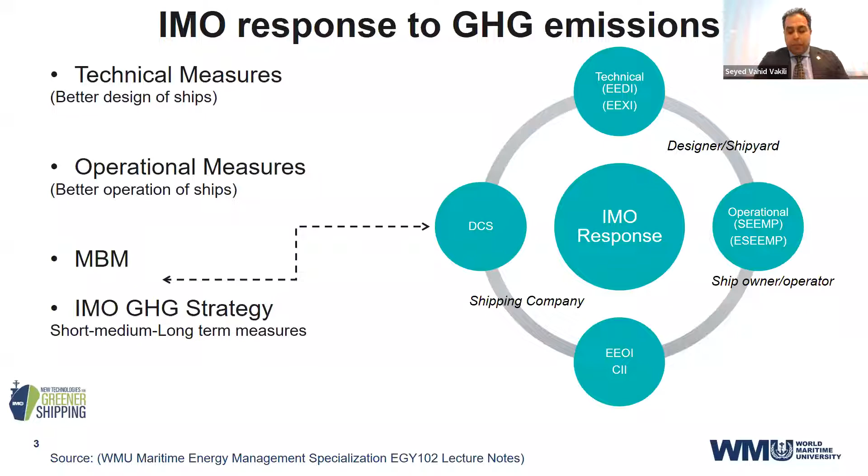The strategy divides the actions needed to achieve the targets into 3 different classes: short-term, mid-term, and long-term measures. As shown in the figure, IMO has applied multidisciplinary measures of technical, operational, and economic nature to reduce greenhouse gas emissions from the industry. EEDI and EEXI are technical measures to reduce emissions, while SEEMP and enhanced SEEMPs are operational measures. The third dimension is market-based measures, an economic perspective that takes into account the carbon market, such as emission trading system and levy, which may be discussed in the near future within medium-term measures.

Now, as I mentioned, this is the first round of polling. I will be grateful that my colleague already shared it, and I will be grateful if attendees attend to this polling. The question is: how much does the shipbuilding phase contribute to life cycle CO2 emissions? I would like to highlight that we are focusing on greenhouse gas emissions, CO2 as a greenhouse gas emission. I will be grateful if participants attend to answer this first question.

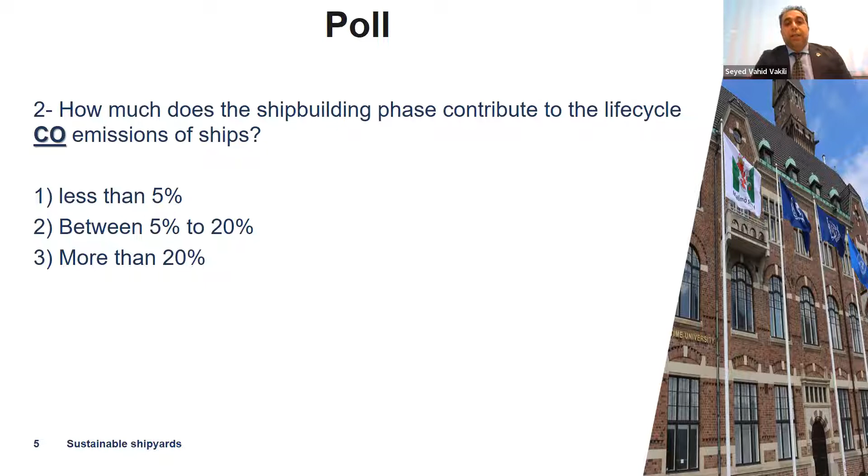And then the second question. Our colleagues are sharing all 6 questions which we want you to attend and answer. Second question is: how much does the shipbuilding phase contribute to the life cycle CO emission of ships? Here the focus is on air pollutant emissions, which is CO nominated here. Is it less than 5%, between 5% to 20%, or more than 20%?

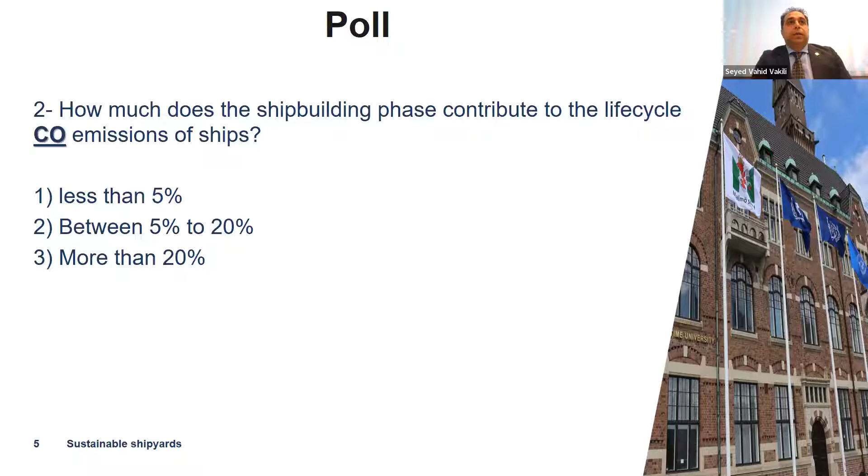The third question is: what is your forecast for the contribution of the shipbuilding industry to air emissions in the future? Will it increase, remain constant, or decrease? So what is your prediction about the contribution of the shipbuilding industry to air emissions in the future? Do you think it will increase, remain constant, or decrease? I will be grateful if all attendees answer this question, which will help us in our future analyzing.

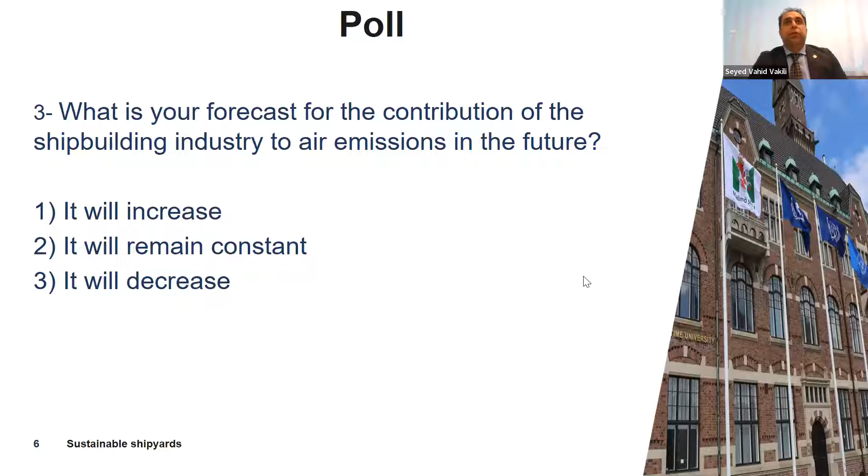The fourth question is: are policymakers recommended to take into account the life cycle emissions of the ship to reduce emissions in order to meet the IMO's greenhouse gas emission targets? As you know, ships have phases: design, construction, operation, and dismantling. Now the IMO is focused on eliminating emissions from the operational phase. But what do you think? Shall IMO consider the other emissions during the construction of the ship and the dismantling of the ship?

Although IMO is responsible for regulating international shipping, it has aimed to reduce and eliminate emissions by the end of the century from the shipping industry. In this regard, it has cooperation with other stakeholders like ports, and considers reducing emissions from ships and port interfaces. Do you think IMO should approach the same trend regarding reducing emissions in the shipbuilding phase also?

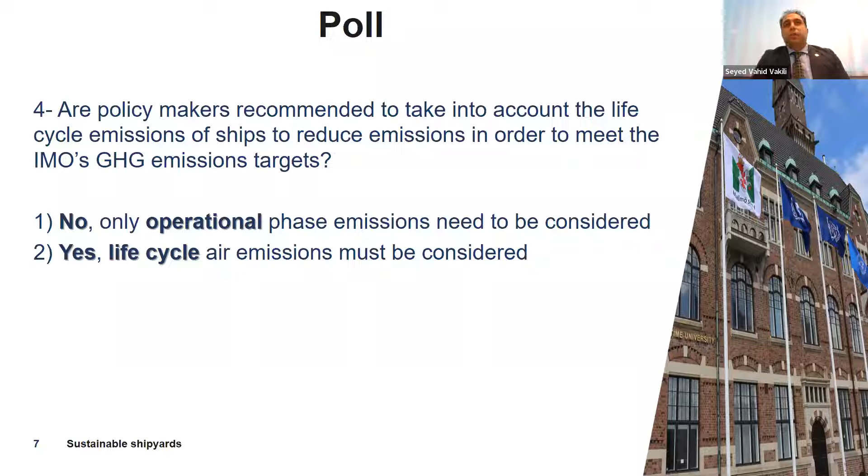The fifth question: is the IMO recommended to take into account the limitation of emissions from the shipbuilding phase in policy, as I explained? In which perspective? Yes, in the short-term period; yes, in the mid-term period; yes, in the long-term period; or no. Again, I would like to highlight, we are asking about the IMO. Shall IMO recommend or take into account the limitation of air emissions from the shipbuilding phase in the policy? Yes, in short term; yes, in mid-term; yes, in the long term; and no.

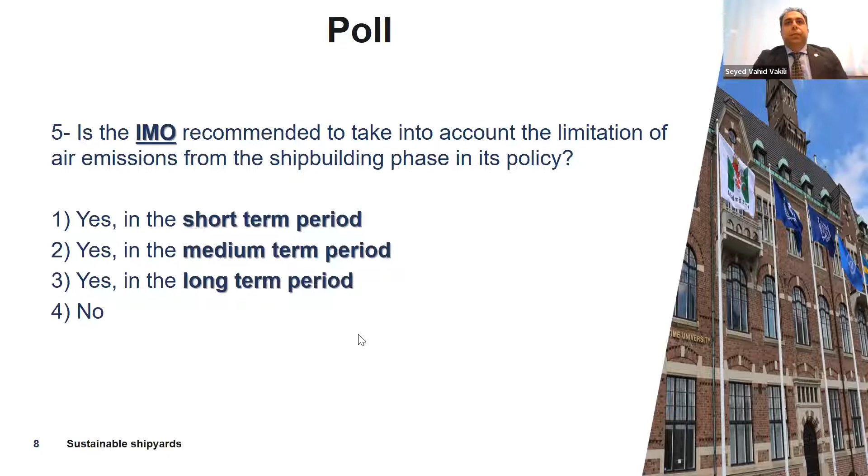And the last question: are the governments - I'm again highlighting, we are talking about state governments - recommended to take into account the air emissions from the shipbuilding phase in their policies, like nationally determined contributions in accordance with the Paris Agreement? Yes, in the short period governments should consider it; yes, in the medium-term period; yes, in the long-term period; and no.

The last two questions will be raised again. I mean that the fifth and sixth questions will be raised at the end of the presentation, and we will compare that with how the answers have been fixed. So we will give 30 more seconds to participants to answer these six questions. We will be grateful if you answer these six questions, which will help us for further analyzing during our research.

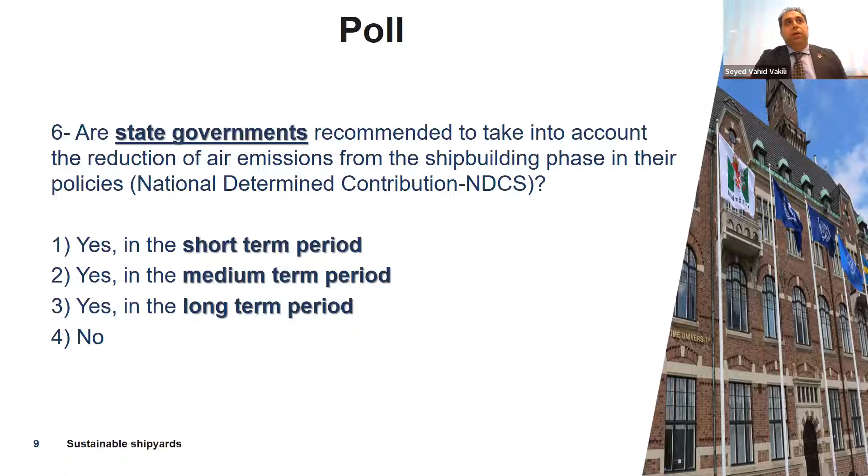Ship's life cycle: the major energy consuming stages during a ship's life cycle can be divided into ship design, shipbuilding, ship operation, and ship scrapping. In addition to greenhouse gas emissions produced during operation, there exist emissions from production, maintenance, and scrapping of ships. While in the design, operation, and scrapping cycle there are regulations adopted to reduce greenhouse gas emissions, there is no such comprehensive and effective regulation on the ship construction cycle. Studies estimate that 96% of a ship's life cycle greenhouse gas emissions are produced by ship operation, while approximately 2% are produced during shipbuilding, 1% during maintenance, and 1% during ship dismantling.

While this provides an important initial indication of the scale of greenhouse gas emissions from shipyards as a fraction of a ship's life cycle, emissions are likely to be sensitive to the types of ships on which work is performed, as well as the work method used.

It is clear that for fossil fuel powered ships, the operational cycle constitutes the majority of its life cycle air emissions. However, as shipping is anticipated to move toward zero carbon fuel, electricity, and renewable energy such as solar and wind, the fraction of shipyard operation in a ship's life cycle will become larger than the operational phase within the next decades. Studies show that if a car ferry was propelled by batteries using electricity from the Norwegian electrical grid, its construction bore a greater life cycle climate impact than its operational phase. Another example is Yara Birkeland, which has zero emissions in its operational phase; however, there is no information about emissions during its construction.

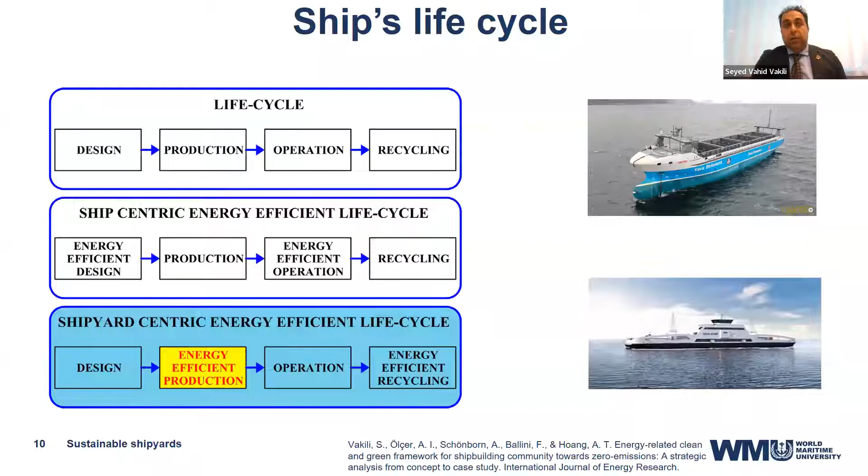Sustainable shipyard.

Shipbuilding produces large amounts of waste and pollutants that each have negative impacts on human health and the environment. Shipyards must play their role and take appropriate action to mitigate their negative impacts. To minimize such impacts, it is crucial that shipyards promote sustainability and follow the sustainable concept within their portfolio, as shipyards introduce considerable pollutants to land, soil, water, and air. Following the sustainable concept could minimize the environmental and societal impact of shipyard operations.

The rationale used to provide a taxonomy for environmentally friendly shipyards is as follows. In this research, we divided pollutants from shipyards into two categories: waste and air emissions. At the moment, there exist national and international regulations on waste disposal, water treatment, and air pollution limits from engines and boilers in shipyards. However, there currently exists no binding regulation for the maximum amount of greenhouse gas and air pollutant emissions permitted from individual shipyards. To achieve a sustainable shipyard, it is necessary to focus on how to manage energy in the long term and how to reduce air emissions from energy sources in the shipyards.

An innovative, holistic, systematic, and transdisciplinary energy management framework to extend the concept of green ship to the lifetime of the ship can assist in transitioning toward zero-emission ships and promote sustainability in shipyards. Shipyards that become successful in eliminating waste from their operations are called clean, and shipyards which eliminate air emissions from their operations, as may be anticipated for future shipyards, are called green shipyards. While the clean concept deals with systematic assessment of environmental aspects and impacts of production and support processes to mitigate pollutants and reduce negative impacts on water, soil, and land, the green concept deals with mitigation of air emissions. The combination of both concepts leads to a boost in environmental sustainability and competitive advantage of shipyards in the competitive market.

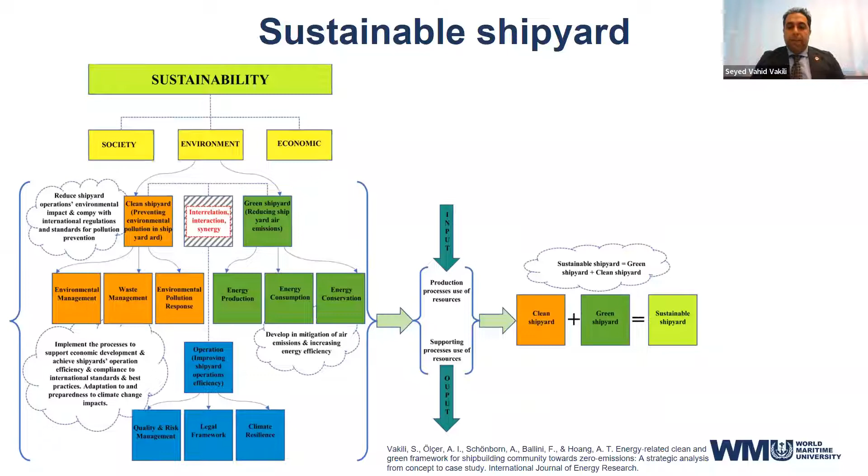The key elements of the clean shipyard in shipbuilding are the 3 R's, as shown in the figure. In order to properly implement the 3R approach, all resources involved in the yard's operation should be divided into two processes: a production process, which includes resources and energy used directly in the production of ships, and support processes, which include resources and energy used indirectly in the production of ships. The criteria of minimization, recovery, and reuse should be paramount for the resources involved in all production and support processes, aiming at eliminating waste in a clean shipyard.

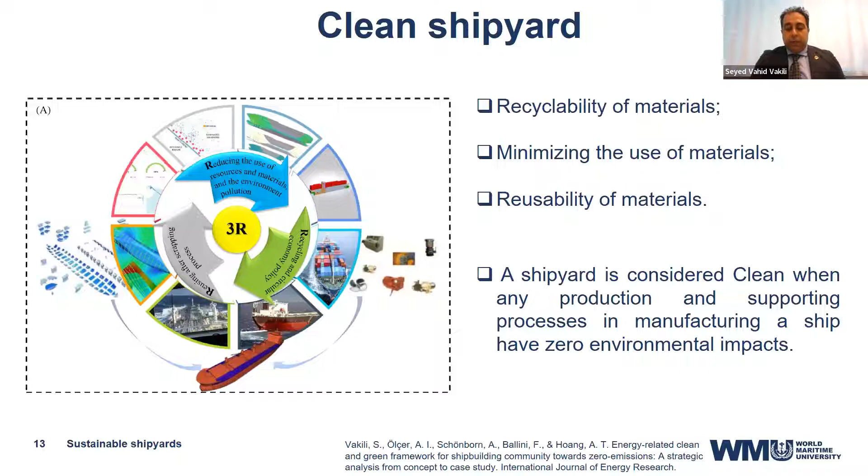Green shipyard. As shown in the figure, and given the energy-intensive nature of the shipyard, the degree of energy consumption is considered to play a crucial role and take an important place in the evaluation criteria for a green shipyard. The criteria for energy consumption and the ability to exclude polluting types of energy seem to be the cornerstone of the green yard concept, highlighting the role of energy and the importance of reducing and eliminating polluting emissions, which can raise awareness among society, yard managers, and policymakers.

Green shipyards should undeniably strive to minimize energy consumption and associated polluting emissions, as well as emissions of non-energy related resources such as volatile organic compounds from coating and paint, and dust from surface treatment, cutting, and welding. Therefore, green yards should consist of three main principles in the energy chain, namely production, consumption, and conservation.

The main elements and objectives of a green shipyard can be illustrated in the figure. The 3E approach, called trias energetica, based on energy, environment, and economy, not only reduces air emissions but also contributes to the design and implementation of a transdisciplinary environmental framework to promote socio-economic criteria for sustainable development. To achieve such a green yard strategy, energy sources must be used as efficiently and sustainably as possible to minimize polluting emissions and improve air quality through a near-zero or zero-emission pathway.

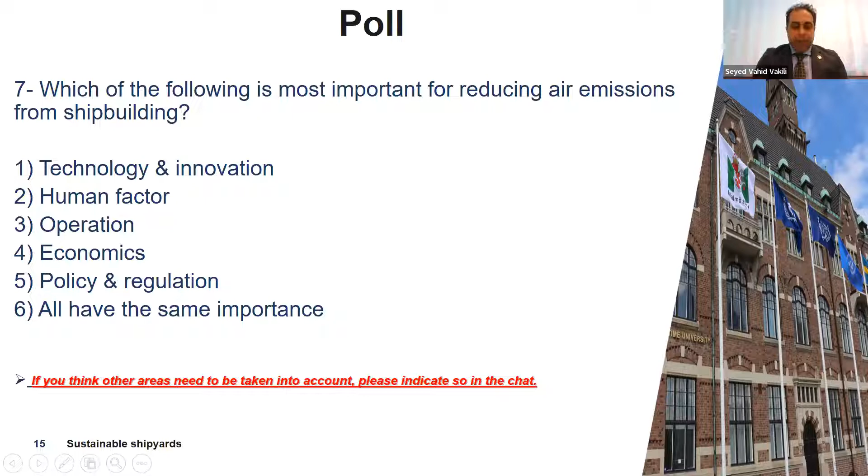This means that in order to solve the problem, we look at energy through the perspective of other stakeholders, replacing one-dimensional thinking with multidimensional thinking. Since energy is categorized in the socio-technical system, it is important to consider the solution—that is, technology—in the related environment and social context. The energy management framework is a transdisciplinary framework and helps bridge socio-technical aspects, and a variety of perspectives, methods, and models can be used to summarize improvements in energy efficiency in shipyards.

Therefore, based on a systematic literature review, different sustainability theories, experimental experience, and interviews with experts, it can be understood that the five disciplines of human factor, technology and innovation, policy and regulation, operations, and economics are the main disciplines for improving energy efficiency in shipyards. The framework is consequently based on these five pillars, which complement each other, and each of which contains different measures and tools that support and promote the energy management framework.

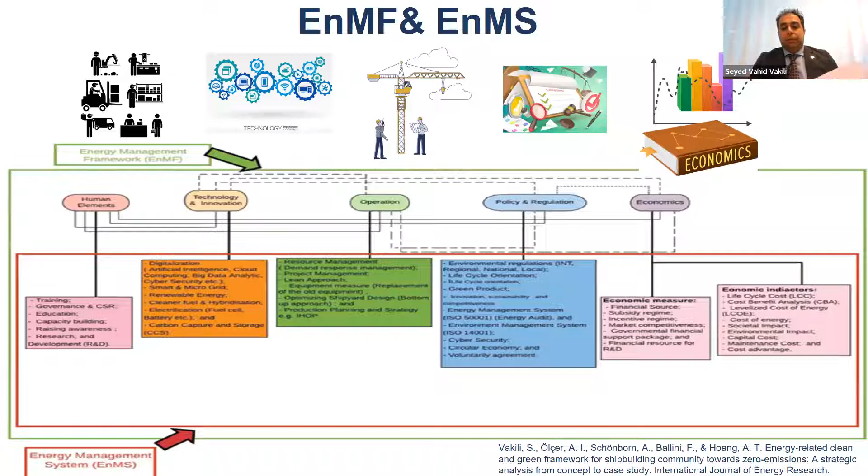Adoption of the energy management framework. Innovation means introducing any new idea, material, policy, or measure into a system to improve productivity and efficiency.

The most critical factor for the success of any innovation is its adoption. As shipping is a complex sector with the engagement of multiple actors, any innovation must be accepted by the relevant social group. There are different types of approaches to innovation.

The linear process is about introducing innovation to problematic criteria until the problem is solved. However, in the energy system, the process is more complex and does not occur through a linear approach.

The innovation must be adopted by the end user, as well as supported through marketing and seeking user acceptance. Furthermore, the innovation must be adopted in different phases and multi-level models, from the micro level with abrupt change to the macro level with long-term changes.

The energy management framework is an innovative instrument in the socio-technical system to support the decision-supporting system in shipyard operations, in order to manage energy consumption and provide decision makers with a framework to make simple, rational, and optimized decisions in a complex environment.

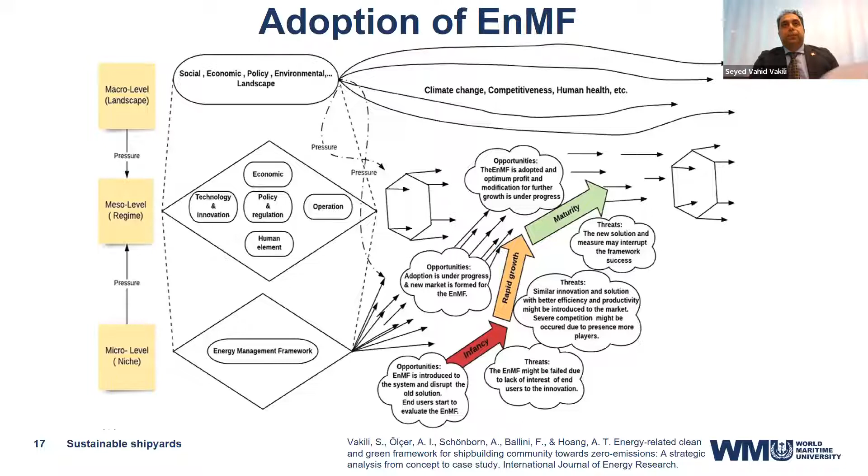Using the developed energy management framework plan, a case study was carried out for some shipyards. However, we will present the result of one of the studies.

Through in-depth interviews with the managers of the yards concerned, and based on the developed energy management framework using a multi-criteria decision-making method, the best options in five defined disciplines were identified and ranked according to the priorities set by the yard manager and the yard portfolio.

Renewable energy and digitalization were selected and identified as the priorities of the yard directors to move toward decarbonization. In this respect, a feasibility study was conducted. In the next slide, we will discuss the results and analysis.

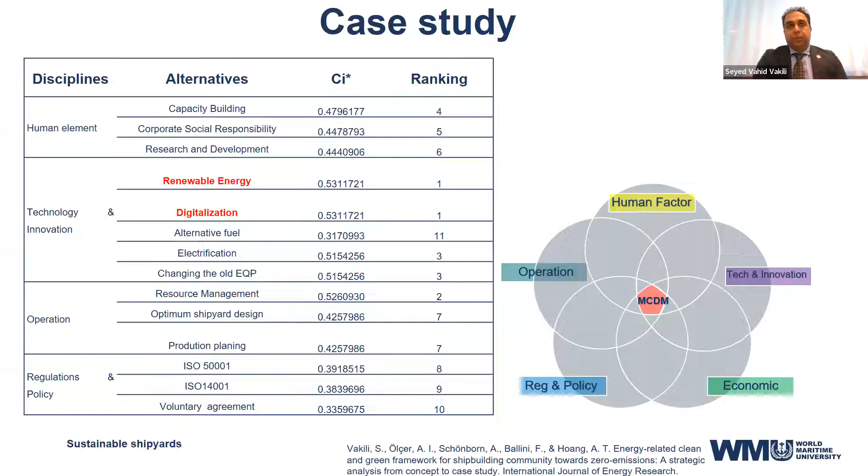Due to the size and design of the yard, there was a limitation for installation of solar panels and wind turbines. The analysis shows that the annual electricity production from solar energy can cover around 60% of the annual energy demand of the yard, and that this is 43% for wind power.

The economic analysis showed that although the levelized cost of energy (LCOE) of solar energy is $0.053 per unit of energy, with a payback period of 6 years and an internal rate of return of 11%, the LCOE of wind energy is $0.195 per unit of energy and has a negative NPV at 25 years, making it not cost effective to exploit.

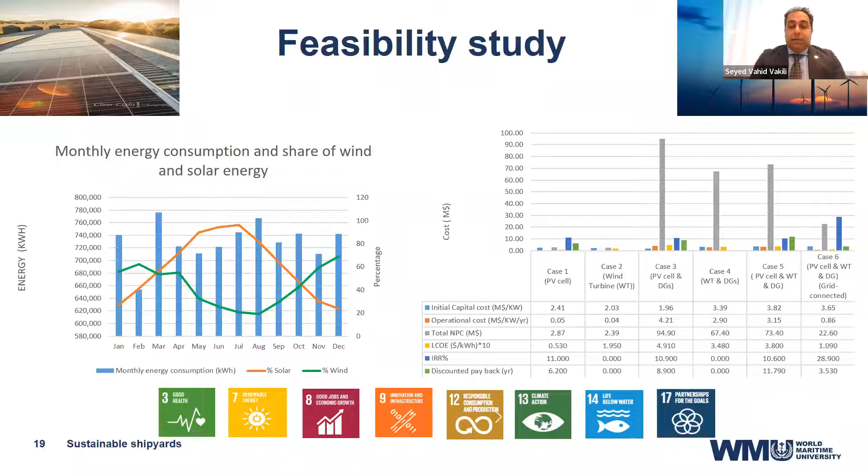In conclusion, we can say that cooperation between stakeholders is essential to promote a zero-emission shipping industry. Industry must be proactive in reducing carbon emissions throughout the life cycle and not wait for it to become a legal obligation. It is important to change the attitude of policymakers toward the life cycle aspect of reducing CO2 emissions from shipping. One-dimensional thinking needs to be replaced by holistic, systematic, and interdisciplinary thinking to break down the silos between different disciplines. It is essential to implement a holistic, transdisciplinary approach to addressing the maritime industry's air emissions. An environmentally sustainable shipyard can act as a driver for the economic recovery of shipyards and promote their competitiveness in the market.